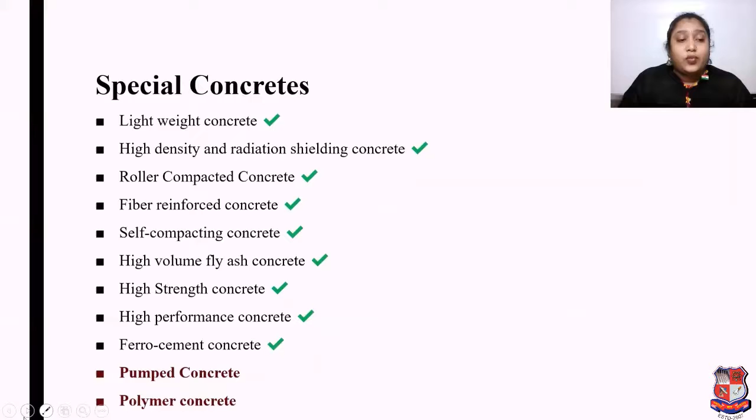In ferro cement concrete, we discussed that meshish type congested elements are there, and in that case we use cement paste or cement mortar type of things as concrete. So now in pumped concrete and polymer concrete, we are going to discuss the applications and technical data.

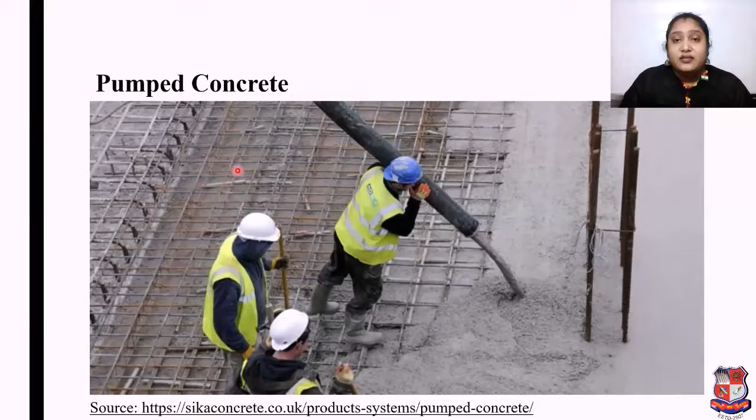Here in pumped concrete, I have put one image from this source. You can see persons working with concrete coming from a pump. Through that image, you can understand that it's a pumped concrete having good fresh properties, easy to handle and easy to work with, because as per high performance concrete, labor is less, reinforcement is congested, and the concrete coming from the pipe means it's having good workability.

As per your syllabus and exam point of view, a concrete which can be pushed through a pipeline is called pumpable concrete. It is made in such a manner that its friction at the inner wall of the pipeline does not become very high and that it does not wedge while flowing through the pipeline.

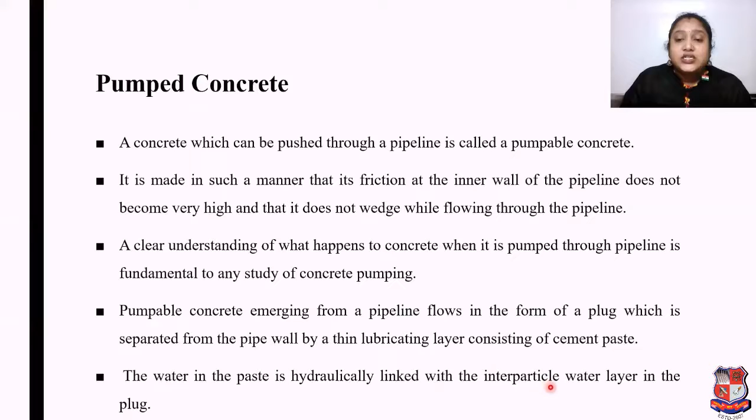A clear understanding of what happens to concrete when it is pumped through a pipeline is fundamental to any study of concrete pumping. Pumpable concrete emerging from a pipeline flows in the form of a plug separated from the pipe wall by a thin lubricating layer consisting of cement paste. The water in the paste is hydraulically linked with the interparticle water layer in the plug.

For continuous plug movement, the pressure generated by the flow resistance must not be greater than the pump pressure rating. However, if the concrete is too saturated at a higher water cement ratio, the concrete at certain pump pressure may be such that water is forced out of the mix, creating an increase in flow resistance and a possible blockage. The figure illustrates such a condition, which we will see in the next slide.

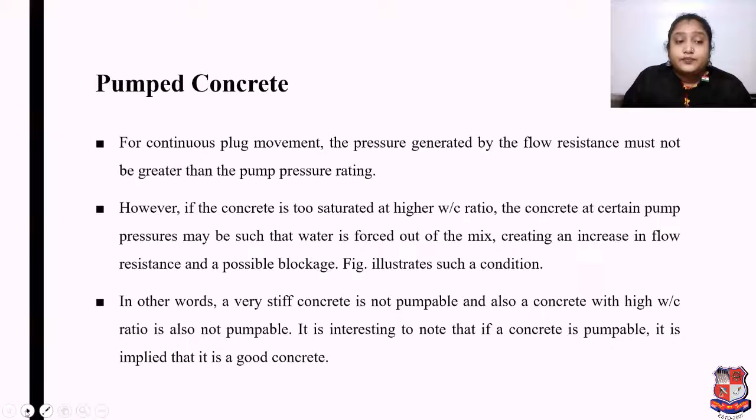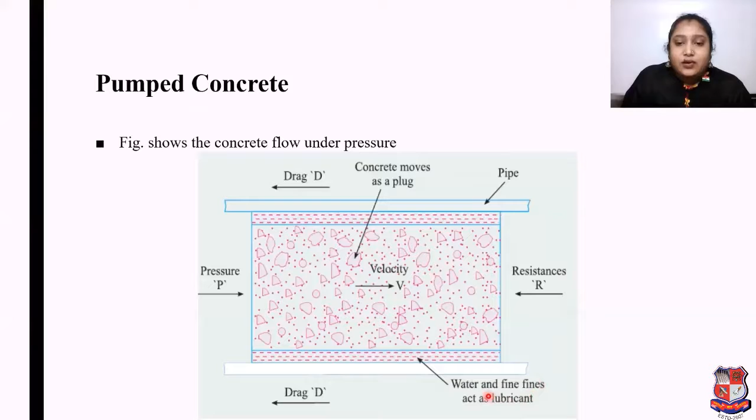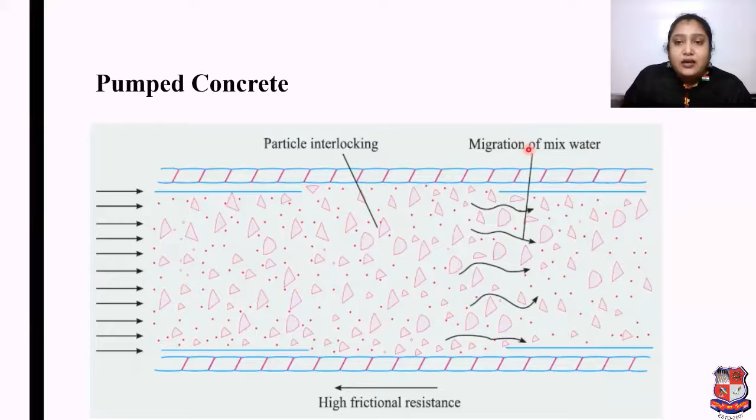In our previous slide, just focus over here. In that part, water and fines act as a lubricant, so there's easy movement of that concrete under pressure through the pipe. But here in this case there isn't any lubricant. So what is happening here is particle interlocking will be there, and migration of mixed water will be there.

So if we consider the design considerations for pumpable concrete, the mix is proportioned in such a way that it is able to bind all the constituent materials together under pressure from the pump, thereby avoiding segregation and bleeding. This is a defect in concrete, but here you have to focus on how the mix is proportioned to bind all materials together under pump pressure while avoiding segregation and bleeding.

The mix must also facilitate the radial movement of sufficient grout to maintain the lubricating film initially placed on the pipeline wall. The mix should also be able to deform while flowing through bends.

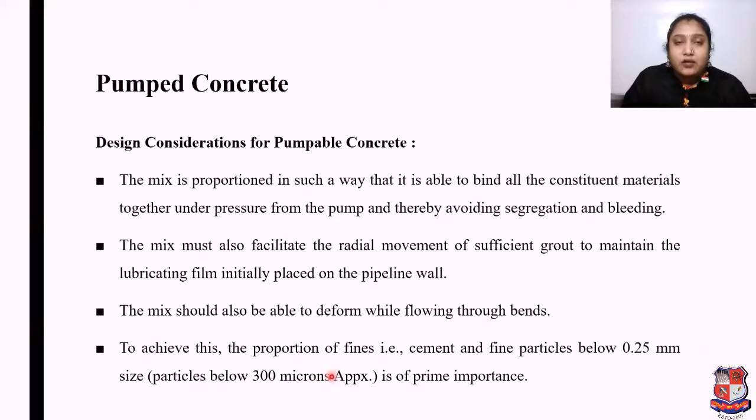To achieve this, the proportion of fines like cement and fine particles below 0.25 mm size, meaning particles below approximately 300 microns, is of prime importance in pump concrete.

The quantities of fine particles between 350 to 400 kg per cubic meter are considered necessary for pumpable concrete. These quantities are not only found necessary for maintaining the lubricating film, but are also important for quality, workability, and to cover individual grains in pumped concrete.

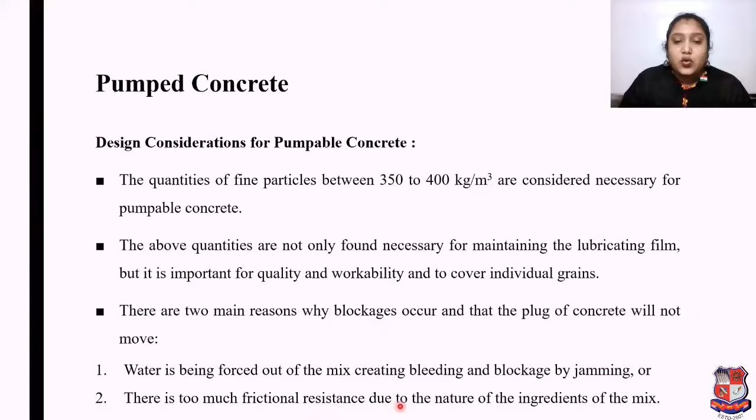There are two main reasons why blockages occur and the plug of concrete will not move. These reasons are: water being forced out of the mix, creating bleeding and blockage by jamming, or there being too much frictional resistance due to the nature of the ingredients of the concrete mix.

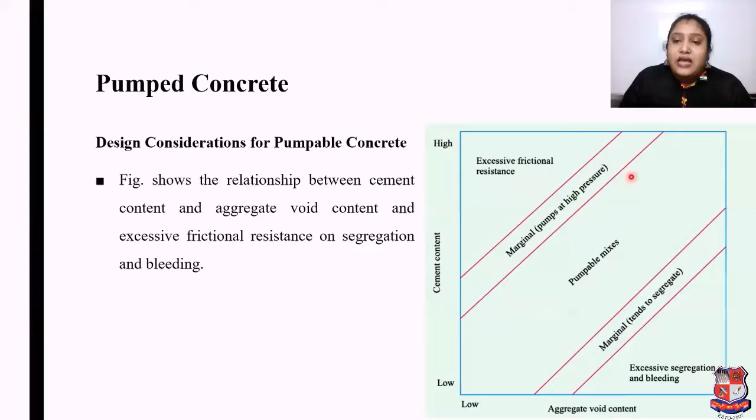So while it is important to maintain good grading and low void content, it is not always possible to design a pumpable mix around ideal aggregate. That we have to keep in mind.

Naturally occurring aggregate as well as crushed aggregate are suitable for pumpable mix, but it is essential to be aware of grading, void content, and uniformity while preparing that concrete.

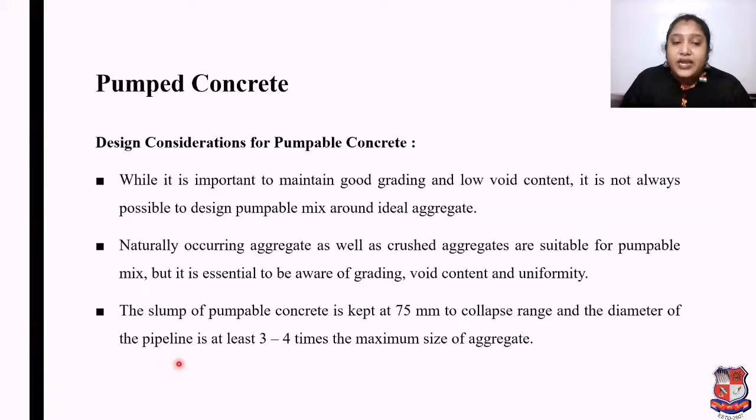The slump of pumpable concrete is kept at 75 mm to collapse range, and the diameter of the pipeline is at least 3 to 4 times the maximum size of the aggregate.

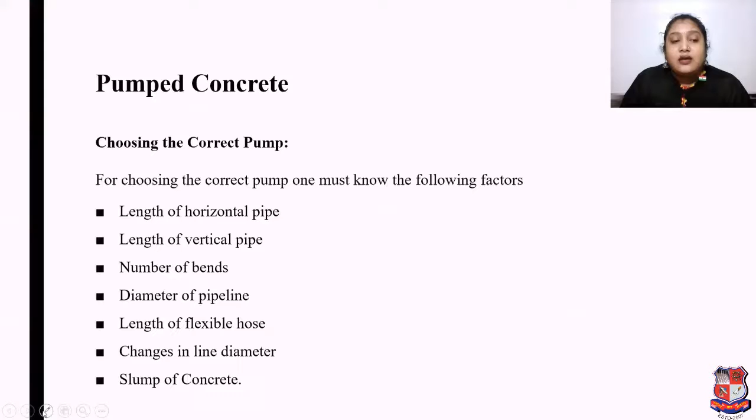If we have to choose a pump for pumped concrete, one must know the following factors affecting the choice of concrete pump: length of horizontal pipe, length of vertical pipe, number of bends, diameter of pipeline, length of flexible hose, changes in line diameter, and slump of concrete.

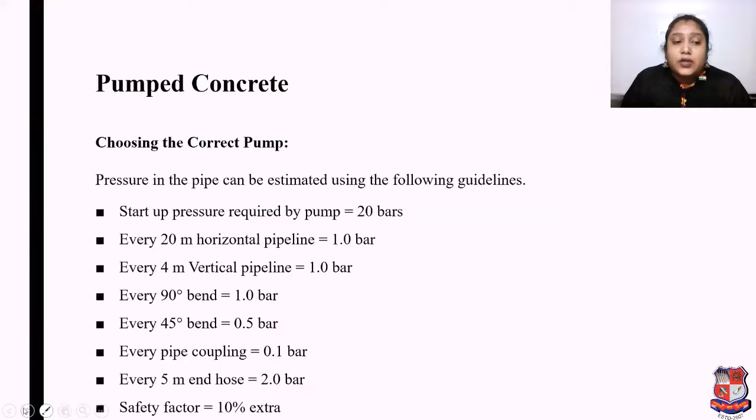Pressure in the pipe can be estimated using the following guidelines. The startup pressure required by the pump is 20 bars. Every 20 meter horizontal pipeline adds 1 bar. Every 4 meter vertical pipeline adds 1 bar. Every 90-degree bend adds 1 bar. Every 45-degree bend equals 0.5 bar. Every pipe coupling equals 0.1 bar. Every 5 meter end hose equals 2 bar, and the safety factor is equal to 10% extra.

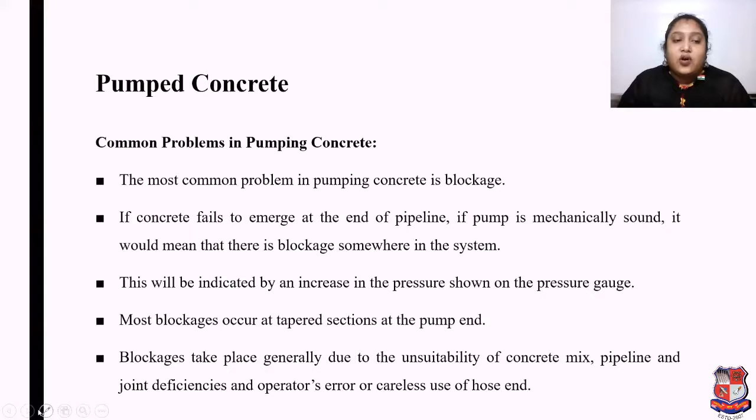It has already been discussed regarding the quality of pumpable concrete. A concrete of right consistency forms a concrete plug surrounded by lubricating slurry inside the wall of the pipeline; with the right amount of water, well proportioned, homogeneously mixed concrete can only be pumped. It can rightly be said that pumpable concrete is really very good concrete, as discussed in the previous slide. Sometimes high temperature, use of admixtures, particularly accelerating admixtures, and use of high grade cement may cause blockages.

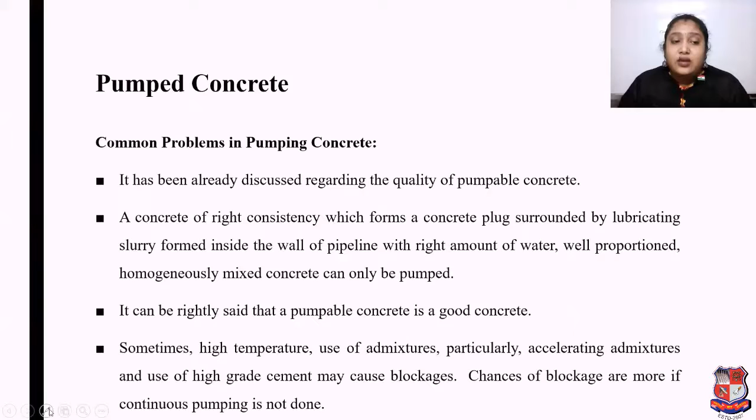Chances of blockage are more if continuous pumping is not done. A pipeline which is not well cleaned after the previous operation, unclean or worn out hoses, too many bends, too sharp bends, and use of worn out joints are also other reasons for blockages.

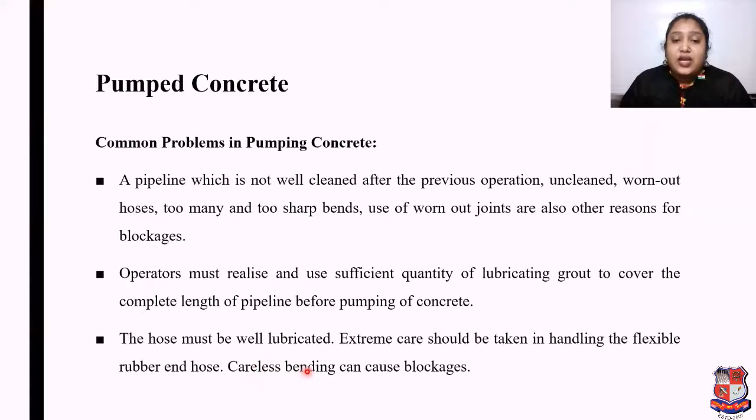Operators must realize and use sufficient quantity of lubricating grout to cover the complete length of pipeline before pumping concrete. The hose must be well lubricated. Extreme care should be taken in handling the flexible rubber end hose, as careless bending can cause blockages.

If we focus on clearing blockages: a minor blockage may be cleared by forward and reverse pumping. Excess pressure should not be blindly exerted, as it may make the problem worse. Sometimes shortening the pipeline will reduce pressure, and on restarting pumping the blockage gets cleared off. Tapping the pipeline with a hammer and observing the sound can often help locate a blockage. Blockage could be cleared by rodding, or by using a sponge ball pushed by compressed air or water at high pressure.

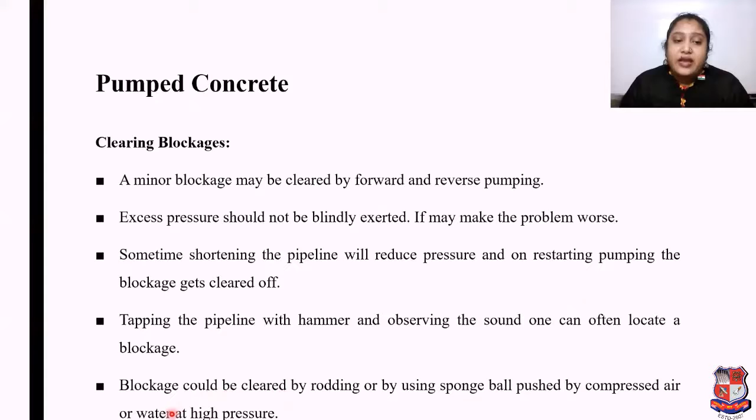Now, focusing on polymer concrete: continuous research by concrete technologists to understand, improve and develop the properties of concrete has resulted in a new type of concrete known as polymer concrete. By the name itself, we can say that polymer plays a vital role in that concrete. The porosity is due to air void, water void, or the inherent porosity of the gel structure itself.

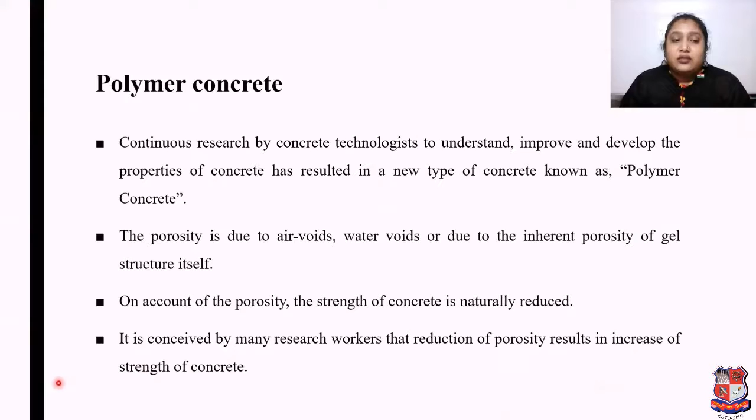On account of porosity, the strength of concrete is naturally reduced. This is clearly understood, and many research workers are convinced that reduction of porosity results in increase of strength of concrete. Therefore, processes like vibration, pressure application, spinning, etc. have been practiced mainly to reduce porosity, as it is a main concern in concrete manufacturing. All these methods have been found helpful to a great extent, but none could really help reduce the water void and the inherent porosity of gel, which is estimated to be about 28%.

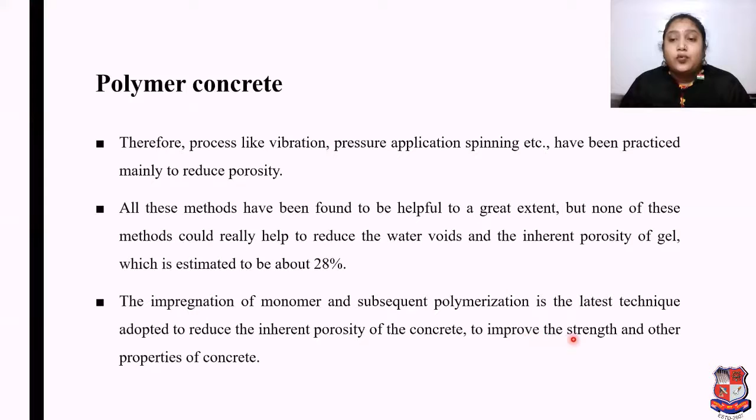The impregnation of monomer and subsequent polymerization is the latest technique adopted to reduce the inherent porosity of concrete, to improve its strength and other properties during manufacturing. The development of concrete polymer composite material is directed at producing a new material by combining the ancient technology of cement concrete with the modern technology of polymer chemistry. We can say that chemistry is playing an important role in producing polymer concrete, and there are a few types of polymer concrete.

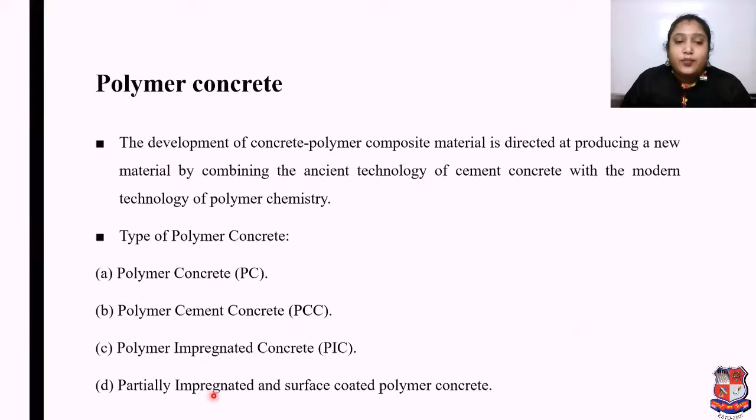Polymer concrete, PC; polymer cement concrete, PCC; polymer impregnated concrete, PIC; and partially impregnated and surface coated polymer concrete.

If we talk about polymer concrete, the development of concrete polymer composite material is directed at producing a new material by combining the ancient technology of cement concrete with the modern technology of polymer chemistry. I clearly tell you that chemistry plays an important role in polymer concrete.

Polymer concrete is an aggregate bound with a polymer binder instead of Portland cement as in conventional concrete. The main technique in producing polymer concrete is to minimize void volume in the aggregate mass so as to reduce the quantity of polymer needed for binding the aggregate. This is achieved by properly grading and mixing the aggregates to attain maximum density and minimum void volume.

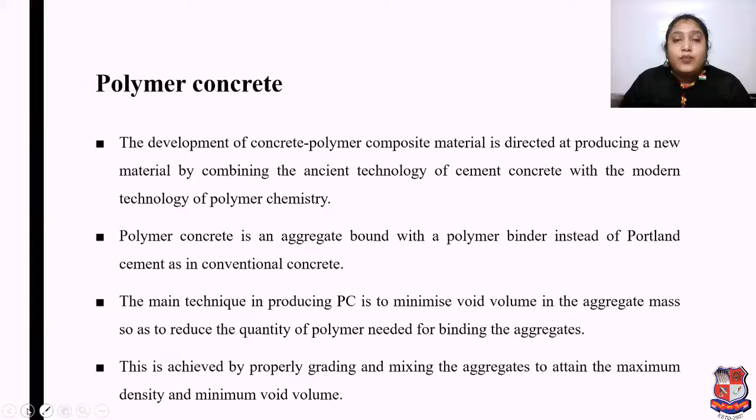The graded aggregates are pre-packed and vibrated in a mold. Monomer is then diffused up through the aggregates and polymerization is initiated by radiation or chemical means. A silane coupling agent is added to the monomer to improve the bond strength between the polymer and the aggregate. In case polyester resins are used, no polymerization is required.

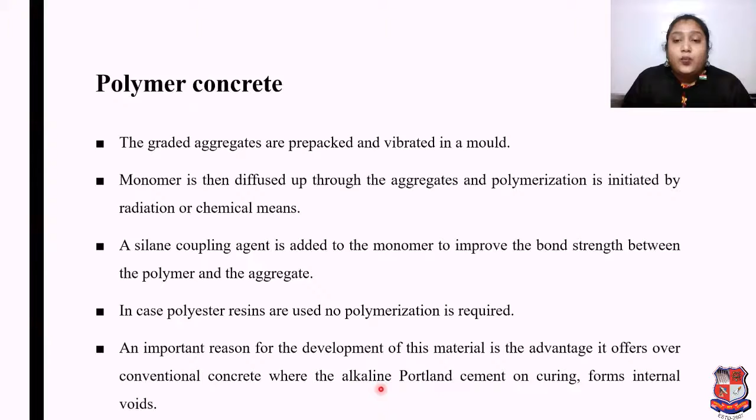An important reason for the development of this material is the advantage it offers over conventional concrete, where alkaline Portland cement on curing forms internal voids. Water can be entrapped in this void, which on freezing can readily crack the concrete. Also, alkaline Portland cement is easily attacked by chemically aggressive materials, resulting in rapid deterioration, whereas polymer can be made compact with minimum void and is hydrophobic and resistant to chemical attack.

The strength obtained with polymer concrete can be as high as 140 megapascal with a short curing period. Please focus on this line: the strength obtained with polymer concrete can be as high as 140 megapascal with a short curing period.

However, such polymer concrete tends to be brittle, and it is reported that dispersion of fiber reinforcement would improve the toughness and tensile strength of the material.

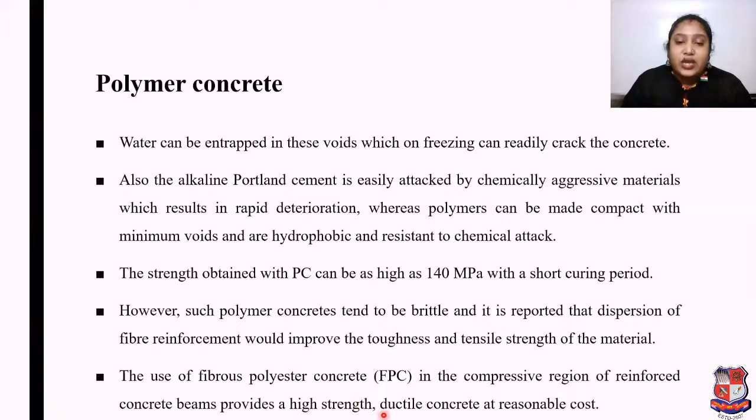The use of fibrous polyester concrete, FPC, in the compressive region of a reinforced concrete beam provides a high strength ductile concrete at reasonable cost. Also, polyester concrete is viscoelastic in nature and will fail under sustained compressive loading at stress levels greater than 50% of the ultimate strength.

Therefore, polyester concrete should be considered for structures with a high ratio of live load to dead load, and for composite structures in which the polymer concrete may relax during long-term loading.

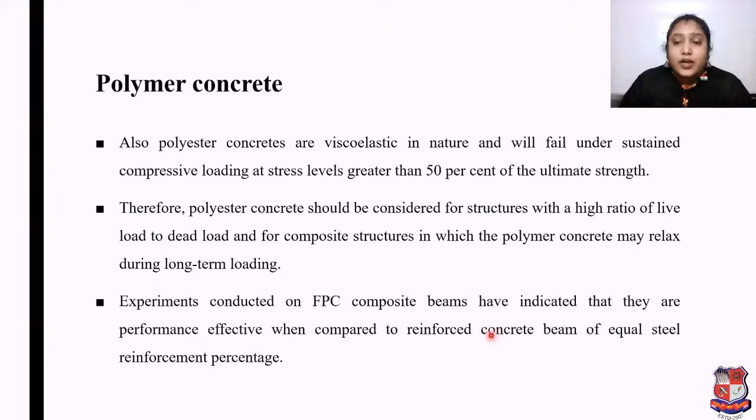Experiments conducted on FPC composite beams have indicated that they are performance effective when compared to reinforced concrete beams of equal steel reinforcement percentage. Such beams utilize steel in the region of high tensile stress.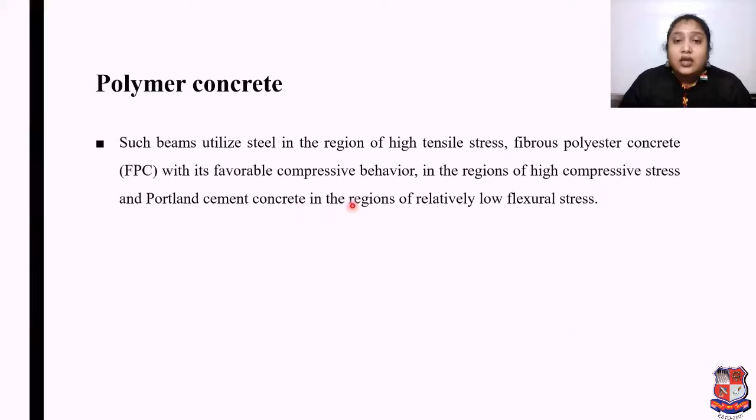Fibrous polyester concrete, FPC, has favorable compressive behavior in the regions of high compressive stress, and Portland cement concrete is used in the regions of relatively low flexural stress.

Now we will talk about polymer cement concrete, PCC. Polymer cement concrete is made by mixing cement, aggregate, water and monomer. This plastic mixture is cast in a mold, cured, dried and polymerized. The monomers used in PCC are polyester styrene, epoxy styrene, furans, and vinylidene chloride.

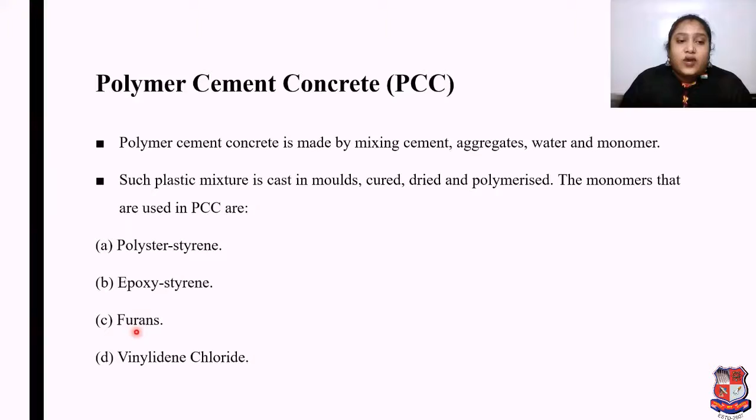However, the results obtained by the production of PCC in this way have been disappointing and have shown relatively modest improvement of strength and durability. In many cases, materials poorer than ordinary concrete are obtained. This behavior is explained by the fact that organic materials, meaning monomers, are incompatible with aqueous systems and sometimes interfere with the alkaline cement hydration process.

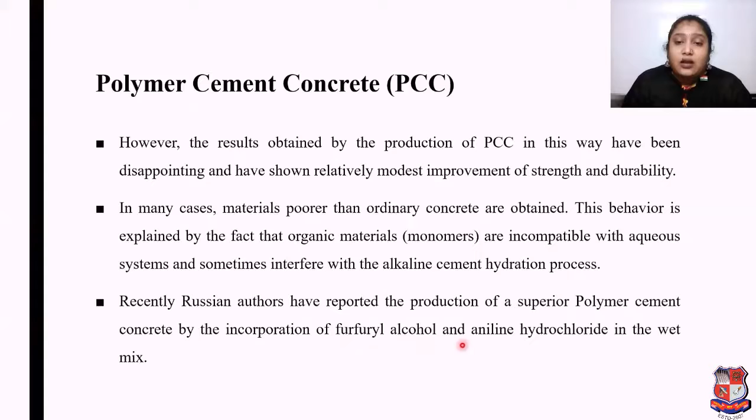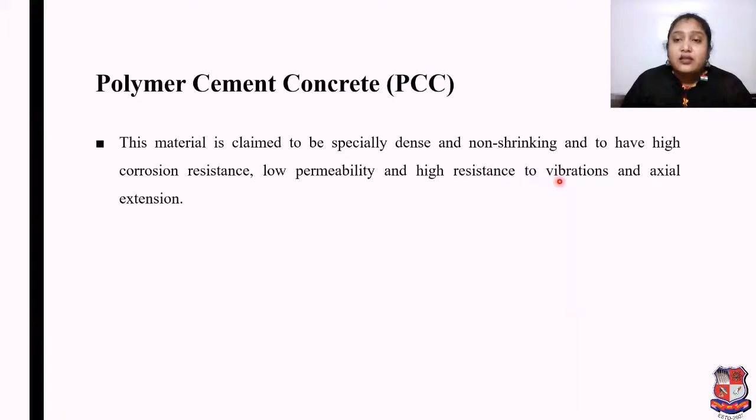Recently, Russian authors have reported the production of superior polymer cement concrete by the incorporation of furfuryl alcohol and aniline hydrochloride in the wet mix. This material is claimed to be specially dense and non-shrinking, and to have high corrosion resistance, low permeability and high resistance to vibration and axial extension.

Now, if we talk about polymer impregnated concrete, PIC, it is one of the widely used polymer composites. It is nothing but a precast conventional concrete cured and dried in an oven or by dielectric heating, from which the air in the open cell is removed by vacuum.

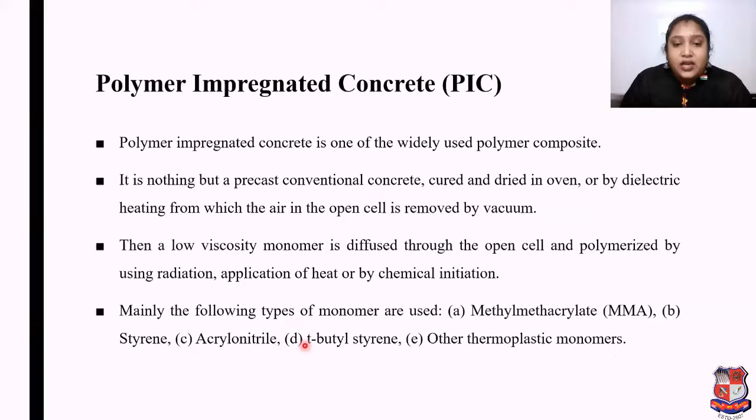Then a low viscosity monomer is diffused through the open cell and polymerized by using radiation, application of heat, or by chemical initiation. Mainly the following types of monomers are used: methyl methacrylate, styrene, acrylonitrile, t-butyl styrene, and other thermoplastic monomers.

The amount of monomer that can be loaded into a concrete specimen is limited by the amount of water and air that has occupied the total void space. It is necessary to know the concentration of water and air void in the system to determine the rate of monomer penetration.

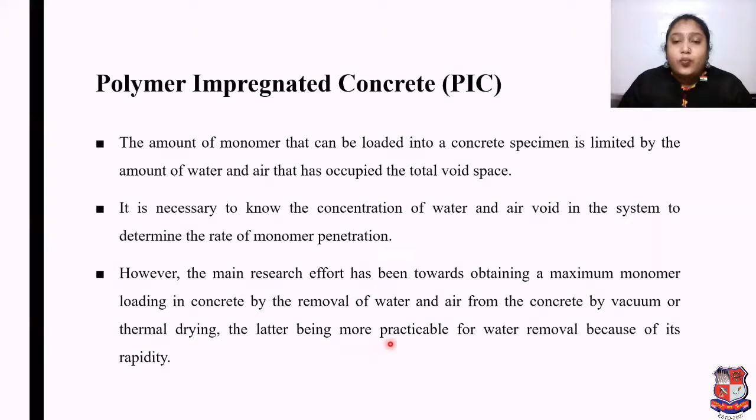However, the main research effort has been towards obtaining maximum monomer loading in concrete by the removal of water and air from the concrete by vacuum or by thermal drying, the latter being more practicable for water removal because of its rapidity. Another parameter to consider is...

evacuation of the specimen prior to soaking in monomer. This eliminates the entrapment of air towards the center of the specimen during soaking, which might otherwise prevent total or maximum monomer loading. The application of pressure is another technique to reduce monomer loading time.

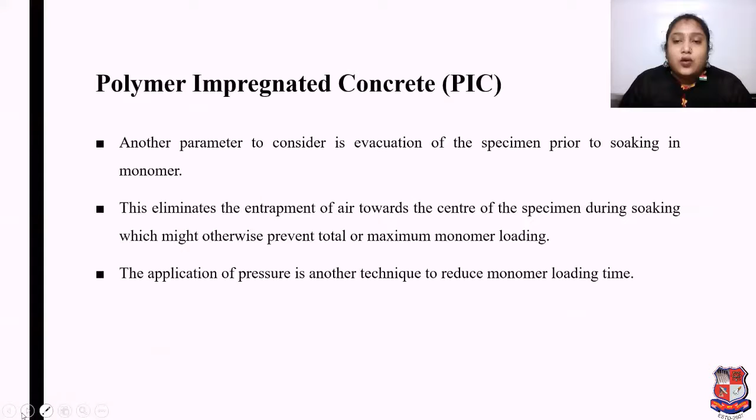Now, if we talk about partially impregnated and surface coated concrete, partial impregnation may be sufficient in situations where the major requirement is surface resistance against chemical and mechanical attack in addition to strength increase. Even with only partial impregnation, significant increase in the strength of original concrete has been obtained.

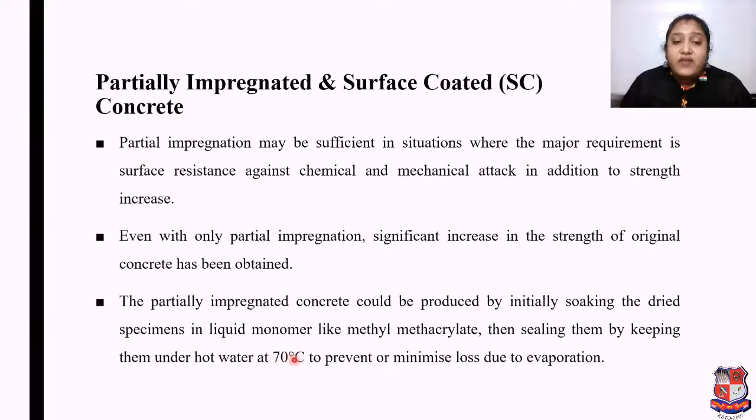The partially impregnated concrete could be produced by initially soaking the dried specimen in liquid monomer like methyl methacrylate, then sealing them by keeping them under hot water at 70 degrees centigrade to prevent or minimize loss due to evaporation.

The polymerization can be done by using thermal catalytic method in which 3% by weight of benzoyl peroxide is added to the monomer as a catalyst.

It is seen that the depth of monomer penetration is dependent upon following: pore structure of hardened and dried concrete, the duration of soaking, and the viscosity of the monomer.

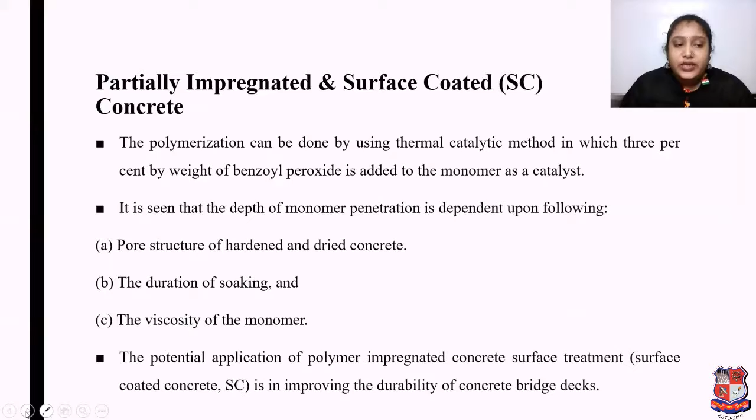The potential application of polymer impregnated concrete surface treatment is in improving the durability of concrete bridge deck. Bridge deck deterioration is a serious problem everywhere, particularly due to abrasive wear, freeze-thaw deterioration, spalling, and corrosion of reinforcement.

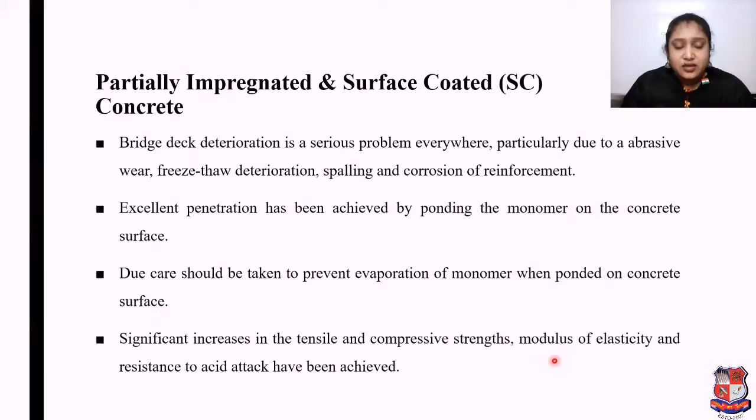Excellent penetration has been achieved by ponding the monomer on the concrete surface. Due care should be taken to prevent evaporation of monomer when ponded on concrete surface. Significant increases in the tensile and compressive strength, modulus of elasticity, and resistance to acid attack have been achieved.

If we talk about properties of polymer concrete: highly impermeable, high durability, resistance to weathering conditions. Under high impermeable, the polymer phase in the concrete will help reduce the porosity and micro cracks that are formed in cement matrix. This acts as an additional binding material other than the Portland cement used.

If we consider under high durability, a dense and watertight concrete is obtained by the use of PCC. This prevents chemical attacks, water penetration, and hence no chance of corrosion. The internal microcrack in cement matrix too is prevented. These increase the life of the structure.

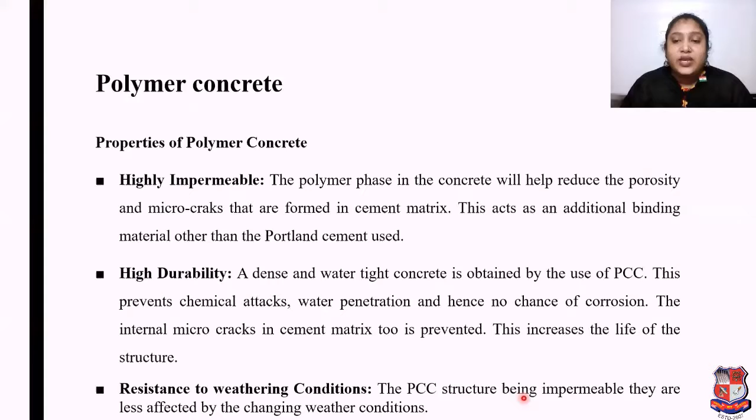Resistance to weathering conditions: the PCC structure being impermeable, they are less affected by the changing weather condition.

Bridge deck covering: the use of PCC helps provide highly impermeable and watertight surface that will prevent the ingress of moisture and chloride, thus avoiding reinforcement corrosion, spalling, and microcrack.

If we talk about floor construction, increased chemical resistance properties, high physical and mechanical properties make it best choice for industrial floor construction. These are also used in pavement construction where the area is subjected to heavy traffic.

Precast construction: good workability and heat curing characteristics demand it for precast operations. PCC units with a lesser water cement ratio can be obtained.

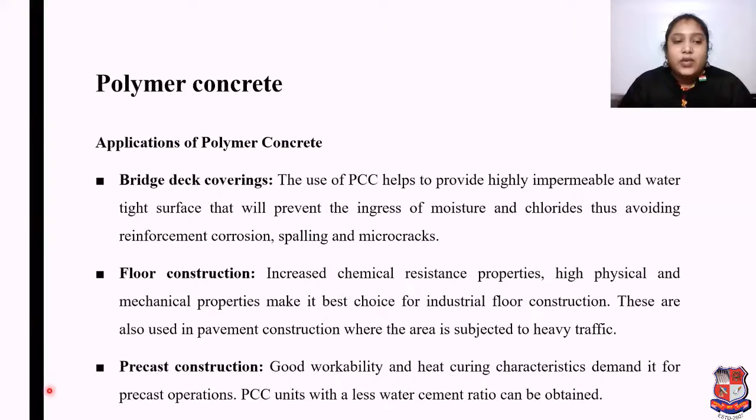Used as patching compound: PCC can be used for patching and repair work of ordinary Portland cement concrete. These increase the strength and life of existing structure. PCC must be applied only after the removal of old material.